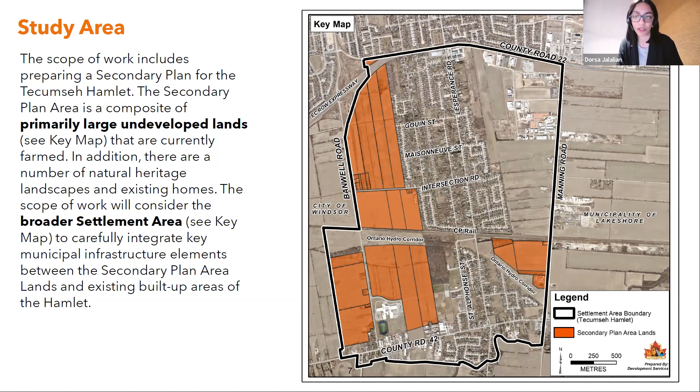In phase 1, we started reviewing the background information and policy context. As you can imagine, there's been a few key policy documents that have been updated and revised since last time we looked at the secondary plan, most notably the town's official plan, the 2021 update to the Parks Master Plan, as well as Transportation Master Plan, and of course, the studies we just mentioned that this reinitiation depended on.

Parallel to this work, we had one-on-one interviews with major landowners to really understand their unique perspective and vision for the future of their lands and the hamlet.

In phase 2, we reviewed the vision and principles we'd previously developed with the community to make sure they're still relevant and speak to the current challenges and opportunities in the hamlet. We did so through an in-person workshop with key landowners, as well as a public information center and a formal in-person open house to review the vision and principles, as well as the concept plan.

So just to quickly provide you with some highlights of the plan, we'll start with the design vision. The secondary plan will shape and guide change in the hamlet in a manner which will preserve the village-like qualities in scale of the hamlet.

The vision reflects an appropriate level of residential and commercial intensification, mix of uses, and connectivity to support a more complete, sustainable, vibrant, and self-sufficient community, in keeping with the many aspirations, priorities, and objectives of the town and existing community. The vision defines a beautiful and distinct new community structured along green corridors that connect neighborhoods throughout.

It will be a complete community — green, walkable, and for everyone to live, work, study, and shop locally.

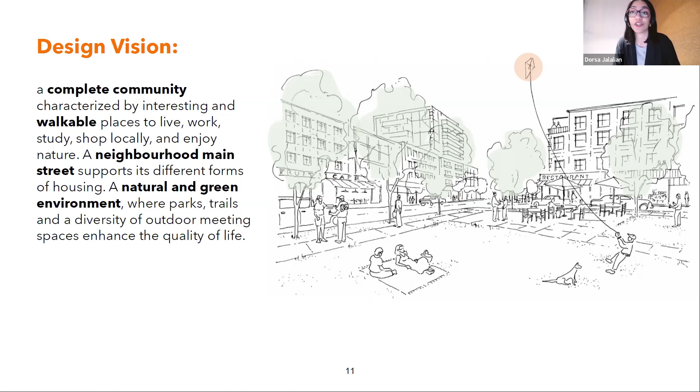And you can also see that to support the vision of providing a complete mixed-use community, we'll have a variety of commercial uses to serve the hamlet.

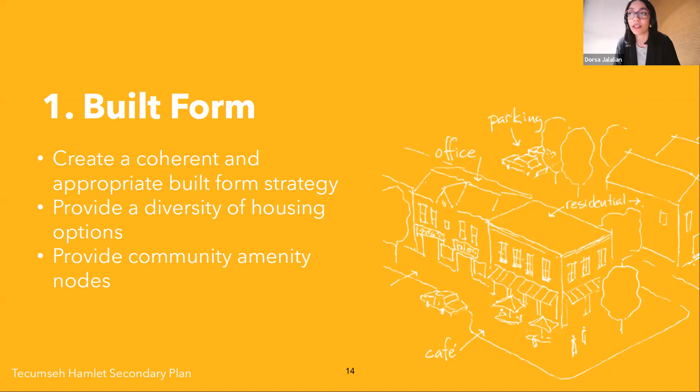To direct the future growth, the secondary plan provides 3 main frameworks: built form, open space, and movement. The built form framework is intended to create a coherent and appropriate built form strategy, provide a diversity of housing options, and community amenity nodes.

You can also see that within the residential land use designations, the plan provides for a diversity of housing options through a variety of density permissions. We have low density, medium density, and high density residential, and the goal is to provide a mix of high quality housing forms, including single family housing to townhouses and apartments.

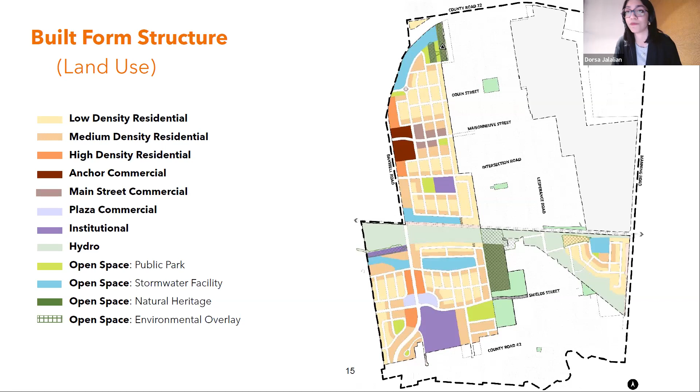So let's take a closer look at the built form permissions of the proposed land uses. Something to note is that all residential designations are consistent with the provisions of the town's official plan in terms of height, massing, and density.

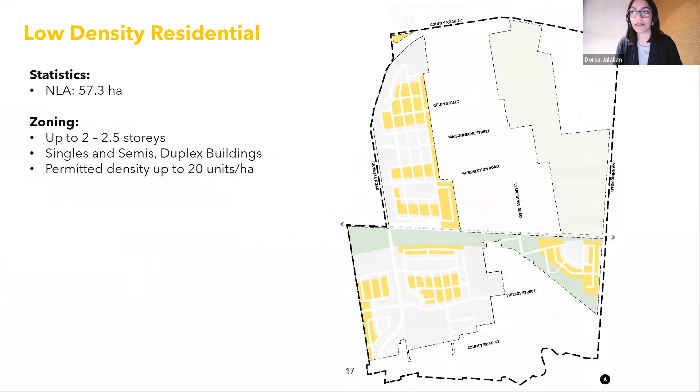Low density residential will permit up to 2.5 stories with singles, semi-detached housing and duplex buildings, with a permitted density of up to 20 units per hectare.

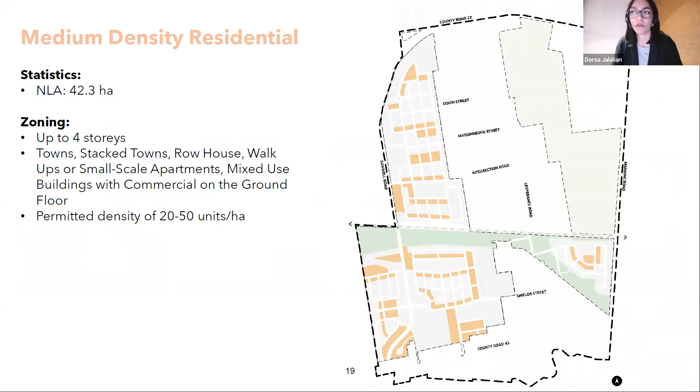Medium density residential will allow for townhouses, stacked towns, row houses, walk-up apartments, and small scale apartments up to 4 stories, permitting a density of 20 to 50 units per hectare. You can see how we have both low density and medium density designations within each neighborhood.

As for high density neighborhoods, like mentioned before, they're strategically located along a major corridor and within the 2 commercial nodes envisioned for the hamlet. High density residential allows for apartment buildings, nursing homes, rest homes, and retirement homes up to 6 stories, with opportunities for retail at grade and a permitted density of over 50 units per hectare.

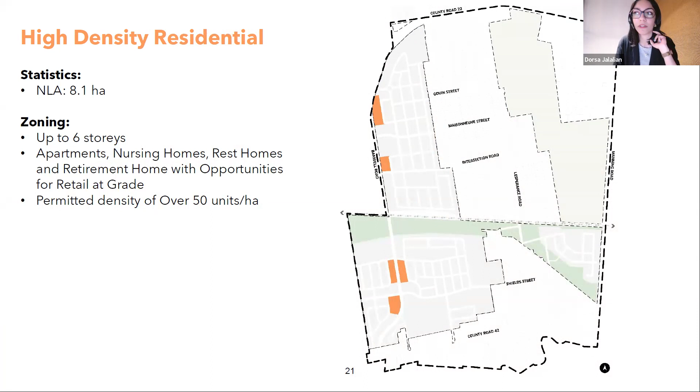Anchor commercial and plaza commercial: the hamlet anchor commercial includes a retail plaza at the intersection of Banwell Road and Maisonneuve Street, serving as the primary commercial anchor for the amenity node area at the north end of the hamlet. Recommended uses for this area include large footprint commercial buildings such as a grocery store and pharmacy, intended to serve the hamlet community as well as the broader community.

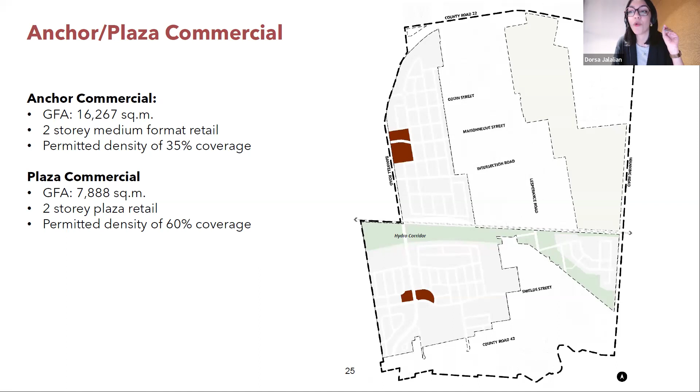The plaza commercial is the commercial node at the intersection of Banwell Road and Shields Street. The primary function of this commercial node is to service local residents and the high school students from across the street, and is envisioned to be more immediate community serving in nature.

You can see how the 2 amenity nodes serve the hamlet, one at a regional scale and one at a more local scale, located so that the majority of the hamlet can easily walk to a community amenity node to get groceries, get ice cream, and meet their needs, basically.

The movement framework intends to create a connected network of streets and blocks and provide active transportation opportunities. For the connected street network, the intent is to create an accessible block pattern with connected streets and shorter blocks and improved circulation to encourage walking and cycling.

You can see how the proposed network connects to the existing roads within the hamlet, but also to the neighboring communities.

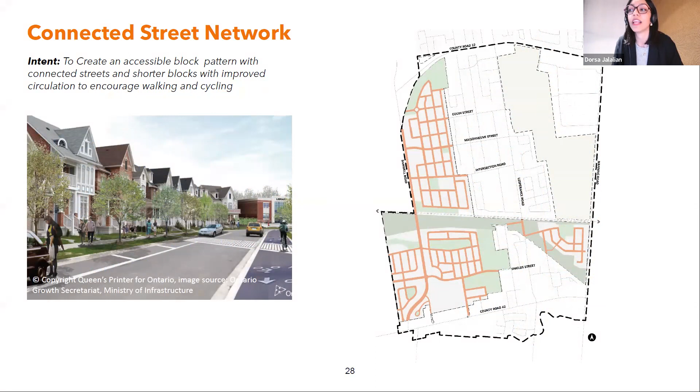The movement framework establishes a hierarchy of streets that create a clear circulation pattern and street network for the hamlet. Each will have their unique street section and right-of-way width, which is currently being looked at in collaboration with the transportation experts at Dillon.

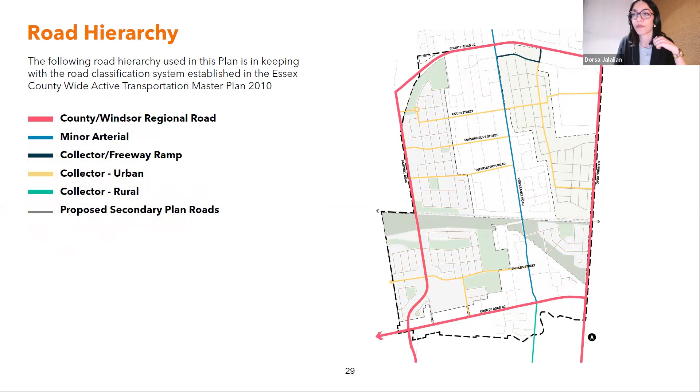Pedestrian network: sidewalks, landscaped open spaces, and other pedestrian infrastructure will connect seamlessly to the rest of the town's walkways and trails, as well as to the adjacent community's pedestrian network.

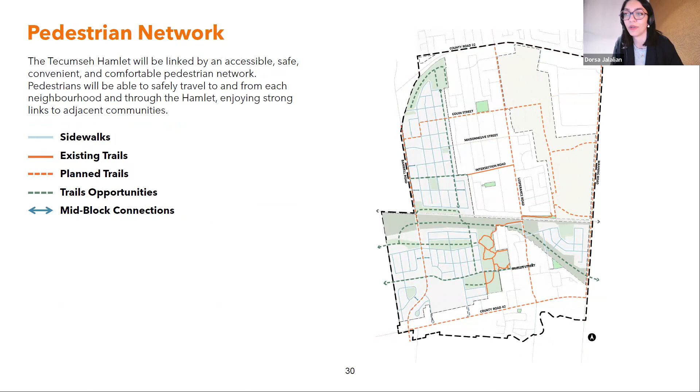As you can see, the pedestrian network includes a safe network of sidewalks shown in lighter blue, and opportunities for trails, which can also benefit from the existing and planned trails already envisioned for the town. The pedestrian network connects all the neighborhoods and open spaces together and ensures connectivity between south and north of the CP rail as well.

The cycling network can also benefit from trail opportunities envisioned for the study area, and proposes a safe network of cycling facilities. Certain roads have been identified to accommodate cycling through on-road or off-road facilities, which is also aligned with the town's transportation master plan.

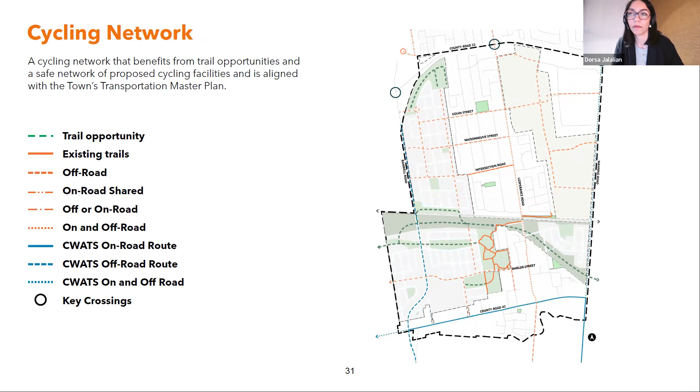In terms of transit, as part of the movement framework, we looked at planned transit for the hamlet and opportunities to enhance and expand future transit. The City of Windsor Transit Master Plan recommends providing services in and to Tecumseh. One of the proposed routes will serve the hamlet, shown here in a blue solid line. To ensure connectivity throughout the hamlet, especially along corridors with higher intensification such as Banwell Road, we are proposing to expand the planned routes.

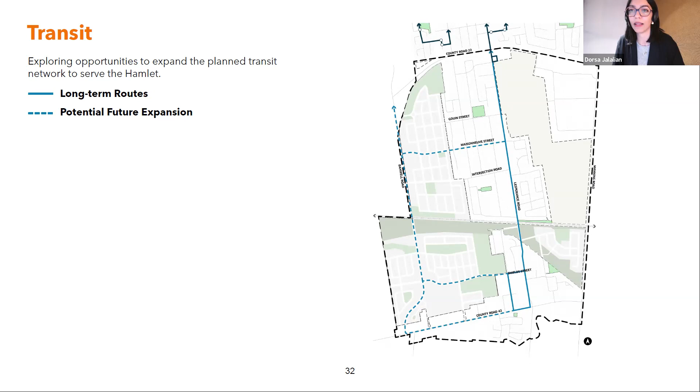Another idea is extending Shields to the west to connect to Banwell Road, as you can see on this map. Extending Shields to the west will be done through careful design consideration, as it goes partially through the McAuliffe Park parking lot, and will be designed with enhanced streetscape, traffic calming measures, cycling facilities, and a multi-use pathway.

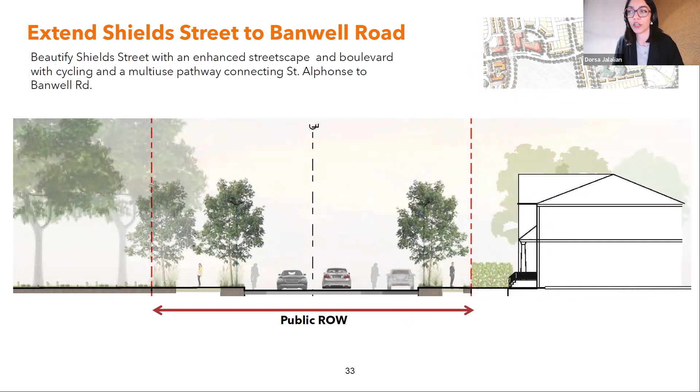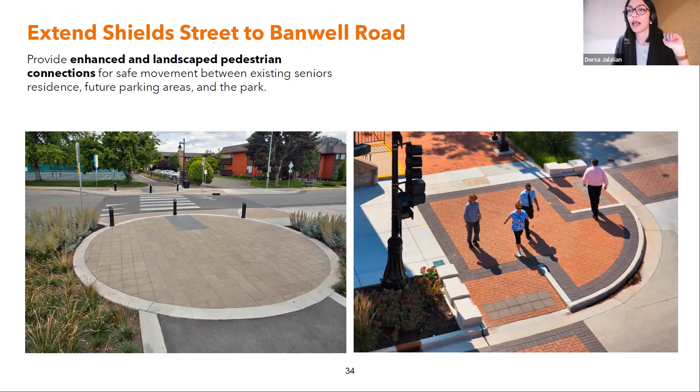Here are some precedent photos to capture the vision for the Shields extension, showing how we are planning to provide enhanced landscape pedestrian connections for safe movement between the existing seniors residence, the future parking area, and the park itself. You can see that we're planning a very pedestrian-oriented streetscape through the McAuliffe Park area for improved pedestrian safety and traffic slowing.

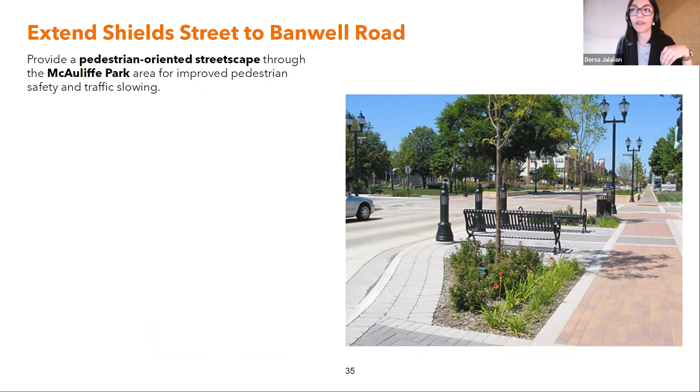Additionally, we have envisioned a double row of trees to make sure that we maintain that green character and enhance the streetscape for that section of Shields.

The open space framework is intended to ensure a high quality public realm environment for the hamlet. It will link outdoor spaces through the creation of new parks, green streets, natural greenway corridors, and multi-use paths and trails to create a unique, beautiful, and healthy public realm environment.

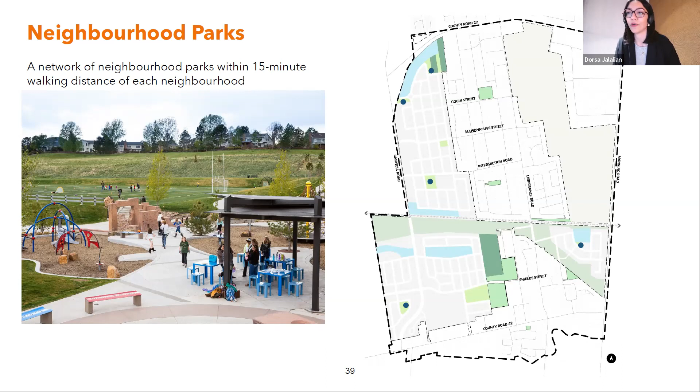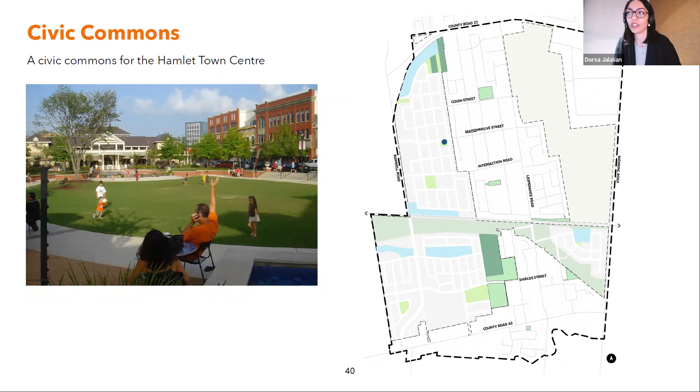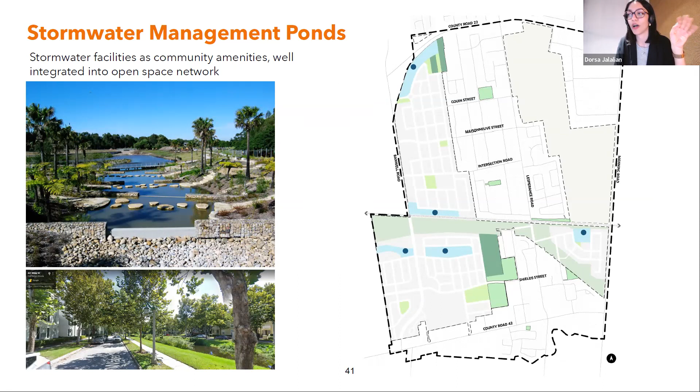Stormwater management ponds, as you all already know, are important infrastructure elements that help manage the quantity and quality of stormwater runoff from urban areas, but they can also be designed to be integrated into the open space network and contribute to the public realm as a public amenity. We have envisioned them to be designed to provide multiple functions beyond stormwater management, such as recreational opportunities including walking trails, bridges, and lookouts. You'll hear more about the stormwater ponds from my colleagues at Dillon in just a minute.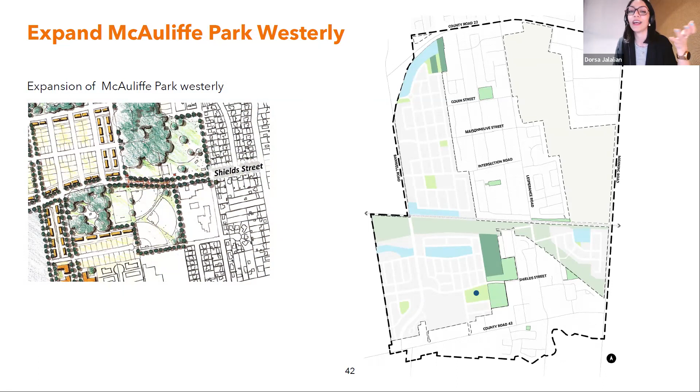Lastly, the existing McAuliffe Park will undergo future enhancement. The park will be expanded westerly along Shields Street to create additional active and passive recreational space, which can include a range of uses and elements, including soft and hard landscaping, innovative and unique children's playground, youth play facilities, public art, and many other features that can be enjoyed by all. Of course, a detailed park master plan will be created in consultation with the community for that later.

So now I'm going to pass it to Dillon to provide an update on servicing considerations.

Okay, thank you, Dorsa, for that. And thank you, Mr. Mayor, Council, and Administration. We at Dillon are working on the servicing component of this secondary plan. So we'll talk a little bit about the servicing strategy to allow the vision that Dorsa described to come to life.

So the first element is servicing. Working with Dialog, we're confirming the servicing requirements based on the population growth projections for this area and developing a plan that's implementable and serviceable, taking into consideration all of the different functional design requirements and conflicts that may arise.

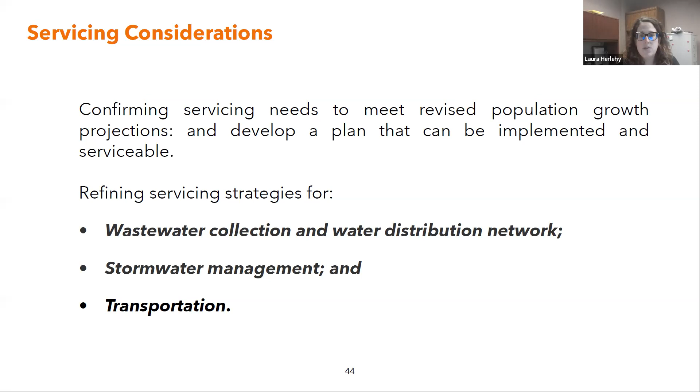So refinements were made to the municipal servicing strategy for this area. Those elements include the wastewater collection system, the water distribution network, the stormwater management network, and the transportation network. We'll go through each one.

First, the wastewater servicing network. The sanitary trunk system improvements were recommended through the town's 2018 Water and Wastewater Master Plan. These recommendations were reviewed and refined based on the latest secondary plan. This plan includes the implementation of a trunk sanitary sewer, that's the red line on the left side of the screen, a large trunk sanitary sewer that connects to County Road 22 at the north end of the site.

It bisects the blue development area routing south, continuing past the rail corridor and through Shields, eventually connecting to County Road 42. At 42, there will be a stub left for the future connection of the Maidstone Hamlet. As part of this work, a diversion sewer is recommended on Intersection Road.

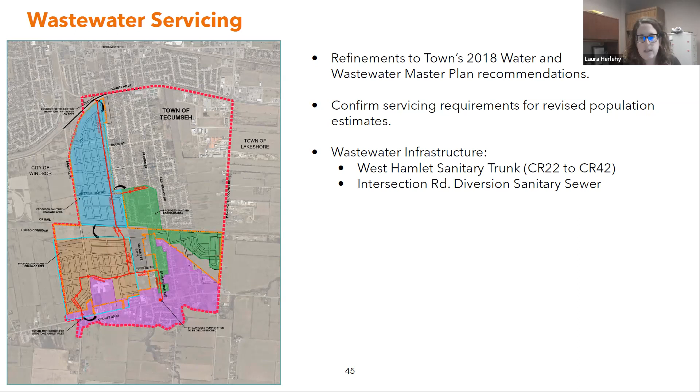Similarly, there's a diversion sewer recommended on Shields. That purple or pink area to the south is being diverted through a diversion sewer on Shields to better distribute the sanitary flows in this area under ultimate conditions.

So the next item is water servicing. Similarly, water servicing recommendations were established in the town's 2018 Water and Wastewater Master Plan. Building on those recommendations, we've refined the alignment of the trunk water main to better align with the proposed road network.

This trunk water main is in a similar alignment to the trunk sanitary sewer that we just reviewed in the previous slide. In addition to this trunk water main, interconnections to the town's existing system will be incorporated. There are various locations where this trunk will interconnect with the town's existing system, including the water main on County Road 22, on Intersection Road, Shields Road, and again at County Road 42.

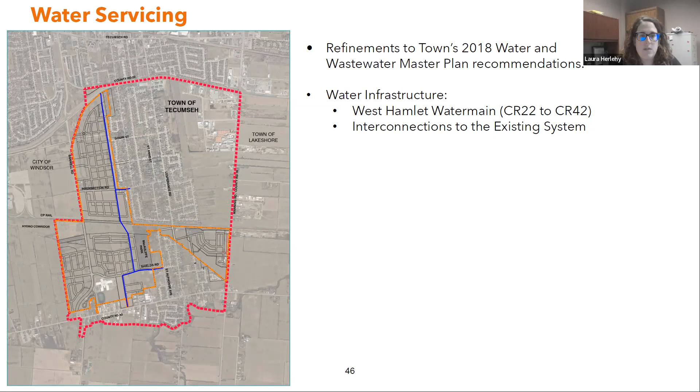From a stormwater perspective, this secondary plan area is broken up into two main drainage areas: the west area, with drainage that generally takes everything from L'Esperance Road west. That area is part of the upper reaches of the Upper Little River.

That area includes 3 municipal drains that exist and are main outlets for this area: the Gouin drain, located in the north portion of the site; the Lachance drain, routed along Intersection Road; and the existing Desjardins drain, south of the rail corridor.

Each of those drains exists. They currently serve the existing residential area in and around L'Esperance and route all of that current drainage west.

The southeast area, which is the southern part of the Hamlet area, is south of the rail corridor and just west of Manning Road. That area is served by the Antaya drain, and it also needs a servicing strategy related to attenuating the runoff that will be accumulated once development occurs. So, next slide.

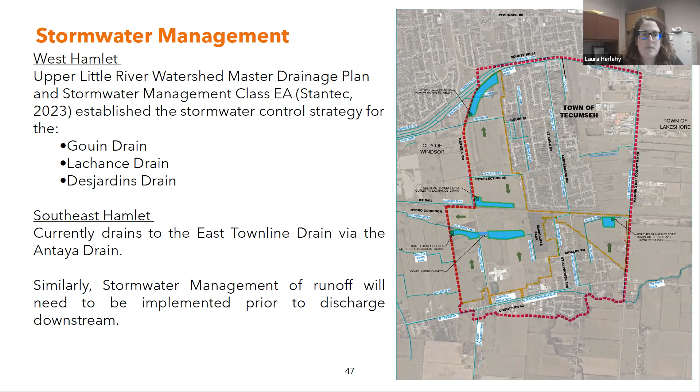Similar to what Dorsa had mentioned, stormwater management facilities are required. These facilities will provide runoff quality and quantity control for all new development areas to make sure they meet the minimum required stormwater management requirements outlined by ERCA, as well as the town's standard requirements.

Each stormwater management pond will be controlled and pumped out by a designated stormwater pumping station. Those pump stations will be located at the downstream end of these ponds, and they'll lift the flow from these deeper ponds to the shallow drains downstream.

Flows will be controlled to the required allowable release rates established through previous studies, and that's all considered in establishing the size and location for these ponds. It should also be noted that overland flow from this area, accumulated on the surface during major rain events, will also be directed to these facilities.

Considerations are also made for existing areas that discharge into those drains. As an example, areas along Corby Lane and Shawnee will also contribute to these stormwater management ponds, and the flow and needs of those areas will be accounted for as well.

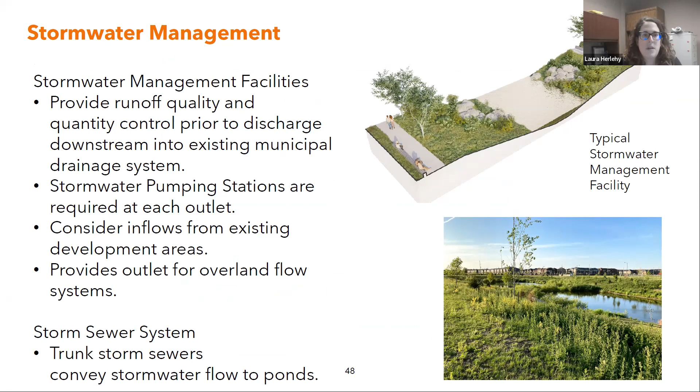Okay, next slide. Generally speaking about the road network, Dorsa spoke about the interconnectivity and the need for collector roads interconnected into this area. The servicing strategy looks at the necessary widths to accommodate active transportation, vehicular, pedestrian and bike traffic, and the underground infrastructure, making sure the right-of-ways are big enough for the trunk infrastructure required. So we're looking at right-of-way requirements for the proposed collector roads, and reviewing how they'll interconnect into existing neighborhoods, including a connection to L'Esperance Road through the Gouin, Maisonneuve intersection.

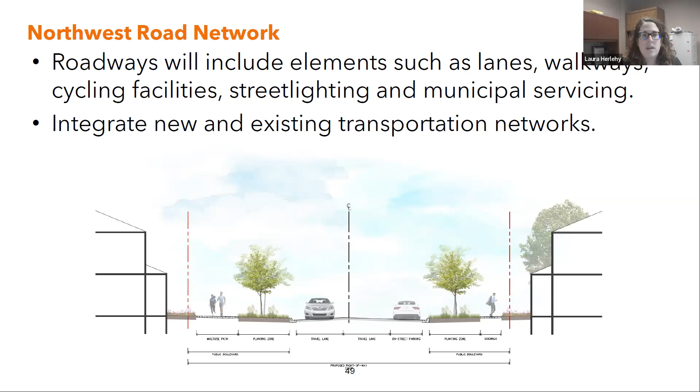Okay, next slide. That was just an overview of the general servicing strategies we're looking at as part of this area.

Second to the secondary plan that's happening, we have started the municipal class EA process. That's meant to review the alternatives evaluated through the previous master plans and come up with more detailed design options reflecting a more detailed inventory of existing conditions in this area. To give an overview of the class EA process: phase 1 is the identification of problems and opportunities and the definition of the scope area. A notice of commencement has been distributed to property owners in the area and adjacent ones, and agencies and adjacent municipalities have also been notified. So this EA has been communicated to the public.

Currently, we are completing an inventory of the natural, social, economic, and environmental landscapes of the area, and we've refined the solutions from those previous master plans based on the latest secondary plan. Our first PIC is scheduled in conjunction with the secondary plan PIC this Thursday, where we'll speak more to where we're at with the EA part of this project.

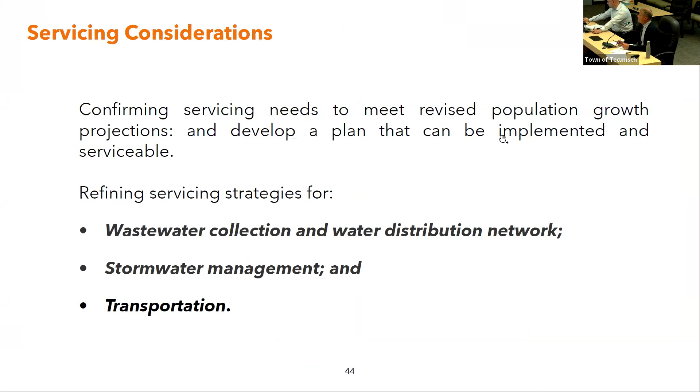What you'll see on the plan, and actually if we could just go to the slide, I think it's 36, my numbering might be off here. It's an open space structure, that one will work, or there's a few. There is a crossing point that's planned and shown as an opportunity between Banwell Road and L'Esperance.

A lot of debate about that internally with the consulting team and administration, between all of us who are involved with this project. I really want to emphasize, I'm doing the talking right now, but there's a whole team of people in the town, multi-departments, and our consulting team involved in this project.

We really do think it's important to try and look first at a grade crossing. They are accomplishable in urban settings. And we think it's vital that this area to the south be linked to the north - we already have a school board with an interest in another site. You can see the little blue symbol shown there as a future potential school site. We think it's important that the walkability and bikeability of the neighborhood be accommodated through an internal crossing. You'll notice it's through the Ontario Hydro Corridor, and it also runs along the east edge of a pond on the north side, so lots of public land in the vicinity.

It's getting through the technical analysis and review of how you introduce a safe crossing at a rail. It could be grade separated - that is a possibility, but unknown at this point. So really what we're trying to identify is that it's a priority for us to have a crossing if we can get one integrated.

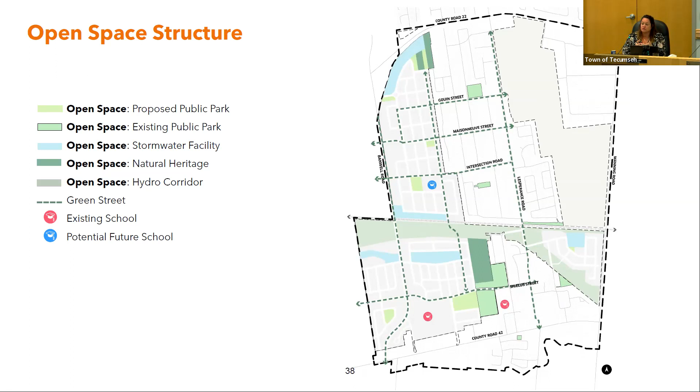The other side, south side of 42, already feels disconnected from Tecumseh, and now with additional amenities and more development to the north, and with the 42 structure changing and widening, there's going to be increased traffic. I'd like to see more opportunity for safe crossing across 42 because of the additional amenities. So, more public meetings, and just consider the development on the opposite side of 42. Thank you.

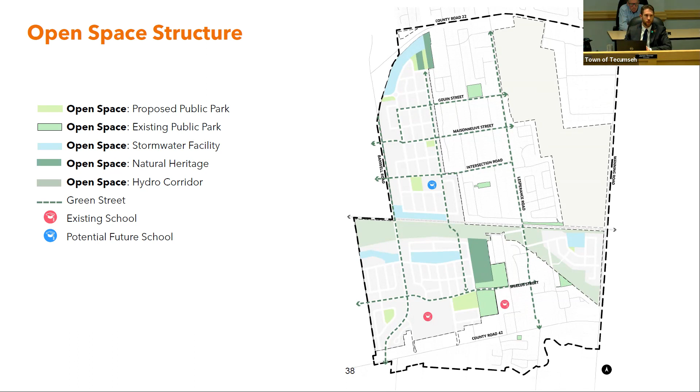Through you, Mr. Mayor, thank you for that question. A couple of things will be drivers. We are engaged with the property owners, particularly to the north, closer to County Road 22. The infrastructure will move from north to south through the planning area. As council will recall, Mr. Bartnik's team is working on advancing infrastructure, particularly some trunk infrastructure from the north to the south, sanitary trunk and water main. I think perhaps a report is coming forward in a couple of weeks with some details on that.

So the town is looking to, where possible, even commence some studies that we require, for example archaeological, and we're doing some of them with cost sharing with the owners. The intent is to open the lands up next year at some point, and then there are any number of opportunities that may or may not be taken up. There are appeal rights through these processes and so on, but what we want to do as a municipality is to create the opportunity.

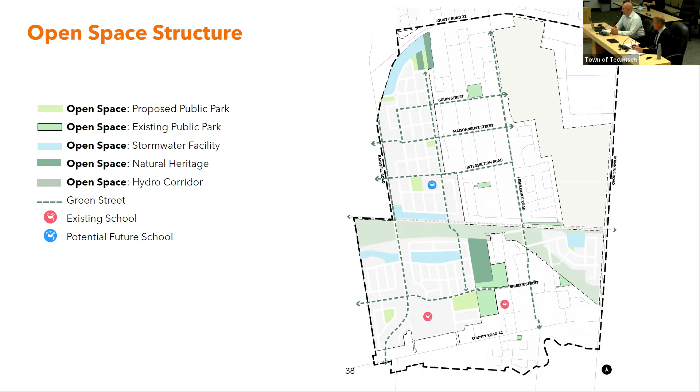To Councillor Dorner, just as an update to council: we did have a report earlier this year to obtain approval for expanded scope for the trunk sanitary and trunk water, as well as some additional funding. We have put out an RFP for engineering consulting services. We do have a report that we're preparing for the April 25th RCM to get a consultant on board. The plan is still to move ahead with the trunk sanitary and water from 22 down to Intersection Road, as well as the interceptor sewer and water main on Intersection Road as phase 1, which would commence early 2024.

Followed by the second phase, which would be the trunk sanitary and water from Intersection Road to south of the hydro corridor. We broke it up in phases because of the additional approvals from CP as well as Hydro One, and we didn't want that first initial phase to be caught up trying to obtain some of those approvals. So we took a strategic approach. We hope to have an engineer on board very shortly, and the detailed design will commence in parallel with this study and the environmental assessment that's also ongoing with the consultants.

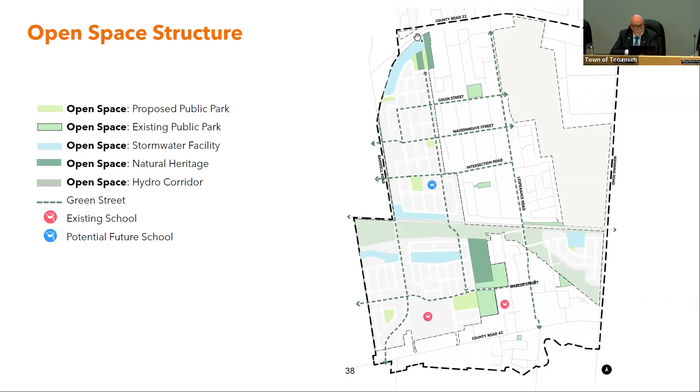Before I call for a recommendation, I just want to extend my thanks to the presenters this evening. This is really an exciting project, and it's been a long time coming. We've done a lot of infilling and our CIP on Tecumseh Road, but this is a new opportunity, greenfield development within the corporation, and we're really excited about it. So I want to thank you for certainly the presentation, and looking forward to seeing what the general public thinks of it in the PIC. We're certainly going to be anxious to see how that next report to council goes, and so we'll be waiting for that.